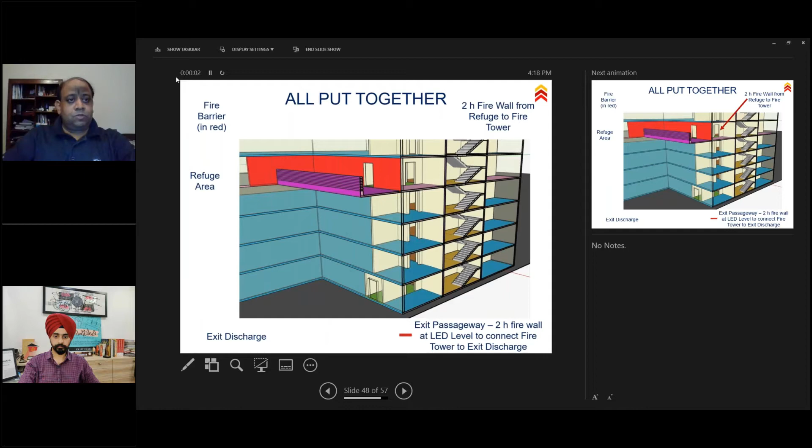Thank you. So I think the topic which we have chosen is to talk about the aspects of the relationship with respect to the fire tower. Now on fire tower, give me a moment, please. Okay, on the fire tower, I think there have been a lot of deliberations ever since it got introduced in the National Building Code 2016 version, which got released on the 15th of March 2017. A lot of deliberation has happened with colleagues, friends, and architects to talk about the various kinds of design requirements on a fire tower.

And I think the whole approach has been to bring excellence with respect to life safety. A fire tower is completely looking at the aspects of life safety, and that's where a very focused understanding is required, in the interest of the occupants who are there in the building. So it integrates a lot of architectural planning and electromechanical planning, and that's the whole approach of having a fire tower requirement.

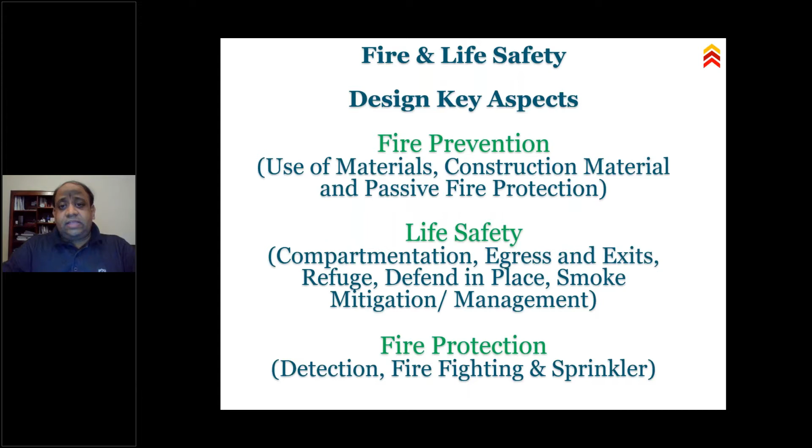And that's the whole idea, to work with my friends, colleagues, architects, engineers, to explain, to understand, and to carry the message of challenges they face in the planning and design of a fire tower. Now, this is one of my favorite slides, which takes me back to school days, listening to the story of the five blind men and the elephant. A lot of times we all work in our own silos, architects, engineers, owners, contractors, everybody looking at the same thing from their own perspective. And that's where a lot of disconnect comes, where we are not able to relate what we want to do.

And the opportunity which we take up at FSAI is to remove those doubts and understand which is the elephant in the room, what we have to deal with, and what we all are working towards: making sure of the fire safety and life safety of the people who are occupying the place. Now, if you really look at a design approach, it goes into many parts.

Smoke mitigation requirements. We hear a lot from everybody saying a lot of people die in smoke rather than in fire. That's true, but the ironic fact is that we also need to resolve the problem. Beyond just saying that a lot of people die in smoke, not in fire, what is to be done so that people do not die in smoke?

What is it that we have to do? Pressurization and ventilation are two great aspects of it. I call it smoke mitigation, because smoke mitigation comes from combinations of various requirements which we plan for. Zoning of the air conditioning system is very important.

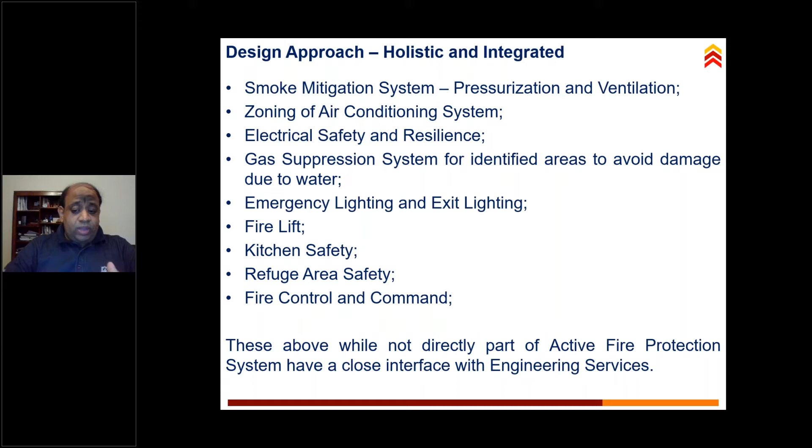But believe me, when you get stuck unfortunately in a space experiencing fire, emergency lighting guides you with lux levels, and exit lighting guides you through indicational arrows. These two are like somebody holding your hand, taking you through difficult times to what's known as an exit. Fire lift, kitchen safety, refuge area safety, fire control and command - these aren't exactly part of active fire protection systems, but they interact very closely with engineering systems. These systems cannot work in silos; they have to be aligned with the engineering systems in a very focused, articulated way.

Now, when we talk about codes and standards, a lot of people have their own interpretation requirements. They have their own policies, their own means. They would like to hear and listen to something which their eyes and ears want to listen to. But is this what the code mentions? Despite the fact that the code would like to highlight as much.

Now, I meet many friends who say, let's say a compartmentation of a space is 3,000 square meters - okay, about 750 square meters you need to do compartmentation. Fair enough. What's the size of your floor plate? My floor plate is, Sandeep, 3,500 square meters. Okay, fair enough. Do I need compartmentation? Yes, if you are over 750 square meters, you need compartmentation.

But do I need compartmentation in the sense that if my floor plate is 3,500 square meters, can I not make it 3,500? If my floor plate is 2,100, can I not do 2,100? The code has not ironically specified the size of the compartment beyond certain areas. So it doesn't mean that if you have to compartmentalize an area into two parts, it can't become an 80-20 split. It was never imagined that the code would be perceived differently, with people doing compartmentation in two different formats.

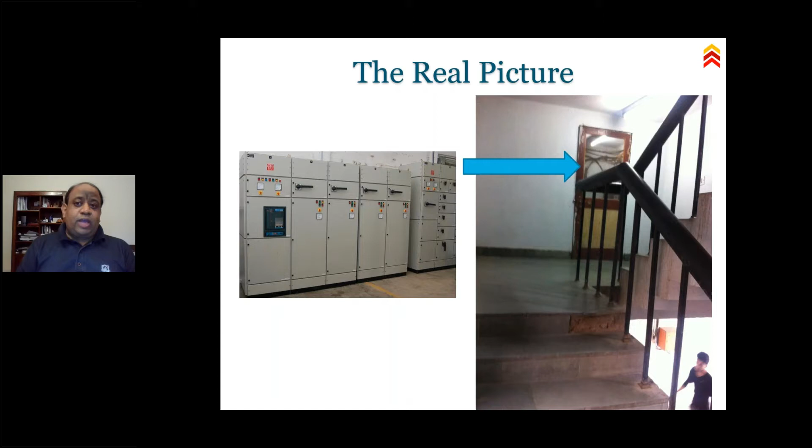So this is what I want to show you. This is from one of the malls - areas of refuge, so-called, occupied by air conditioners. This is another picture I took in Bangalore during one of the meetings. I was there, I looked out, and I saw this is where the problems are. You're looking at another picture from one of the government buildings, which you'd be surprised to see - inside the staircase there's a glass, and the electrical panels are put inside the staircase mid-landing. Now that's again a problem.

So what happened is the exhaust fan was able to suck air from the auditorium into the staircase. So rather than positively pressurizing the staircase, it was negatively pressurizing it, thereby sucking smoke from the auditorium into the staircase and throwing the smoke outside via the staircase.

Now, these are examples which are heart-wrenching to see how misunderstandings have happened and how things have proceeded further. The fear of the unknown - I've taken this from a mall in Calcutta just to show you this is a light and that's a sprinkler.

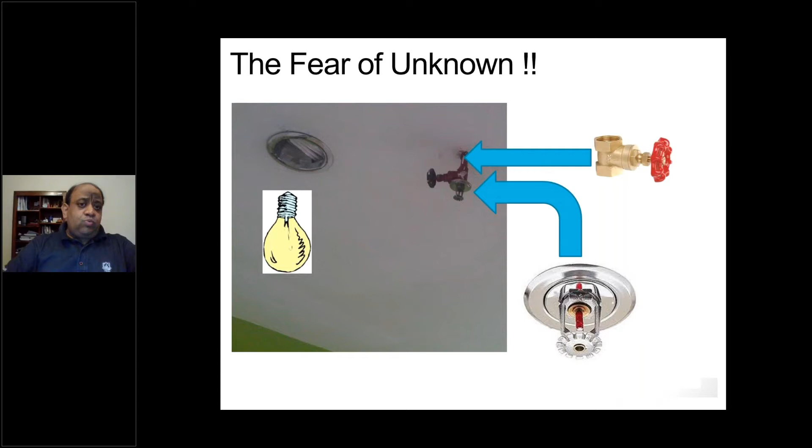Now, can you imagine these situations, with whom would you have to deal with? You're talking about codes, standards, National Building Code, NFPA, whatnot. And this is what we see, which really is so scary to see.

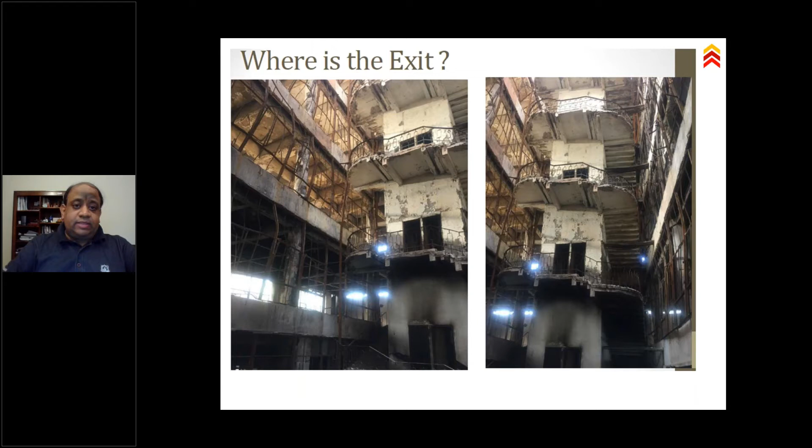Now I have another example which asks, where is the exit in this building? A lot of people would think that the staircase which is there is an exit. But ironically, in this building, there is a staircase, but there is no exit.

This is the National Museum in Delhi, which had a fire in it. Fortunately we did not lose life, but I think we lost something equally valuable, which was our assets. Once we went inside and saw the spaces, we realized how bad it could be. Fortunately, museums are not places our Indian visitors frequently go.

Unlike the Western world, they have more museums and less population - we have fewer museums and more population. So going into museums, I don't remember my friends telling me they've taken their kids to a museum. We take them to other kinds of fun parks, but we don't take the kids to the museum.

But now the element which came out of it was that typically, this is not an exit. A lot of architects would think a staircase is an exit. But typically speaking, a non-protected staircase is not an exit.

So what you see in the diagram over here - if you go around many places, you would see staircases which are open in spaces. Now, those staircases which are open in spaces are not to be considered an exit. They are pretty vulnerable. So travel distance is always counted from the end of the path to the door where you're going, because your open staircases become part of the travel distance criteria to be met. This is very important to understand - any staircase which is open is not an exit.

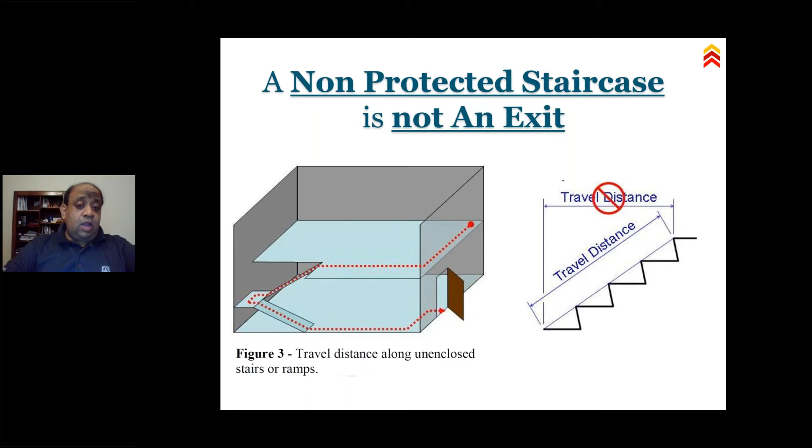And the National Building Code very clearly prescribes that an exit is only the one which is enclosed by 2-hour fire rated walls and a door which is kept always in closed position. Now, when you do that, what happens is you're able to allow the people to go down.

But when you get into the National Building Code - I'd like to highlight, since we've got a couple of young architect colleagues here - at some point, our terminology in the code was not very clear. I used to meet a lot of young friends and colleagues who used terms like fire corridor, fire path, fire route, fire exit very generically. Once you use these terms generically, you're not able to speak with the same kind of intent, expectations, and requirements. That becomes a big challenge.

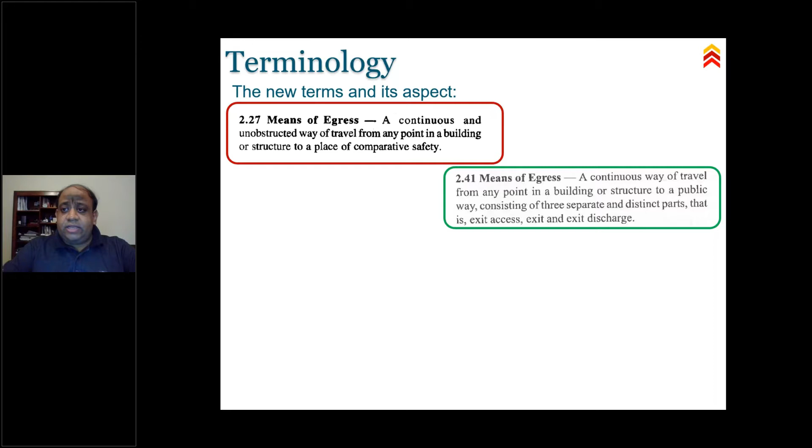So what happens is that as colleagues, we should first understand what the terminology actually means.

And exit discharge is when you come out of the exit. So what is an exit? This is an exit. An exit is always enclosed by a fire door, fire walls. Why do you need an exit which is closed? Because when there is a fire in the building, the exits help you come out through an enclosure which is 2 hours protected by walls and doors, to ensure you are not exposed to the risk of fire as you descend from the upper floors downwards.

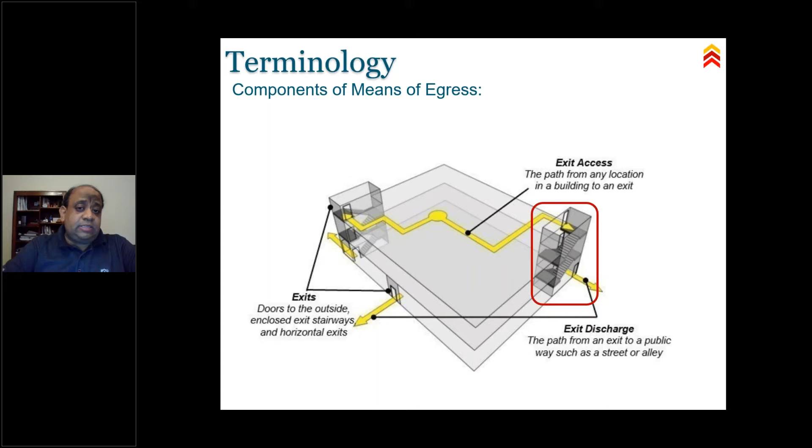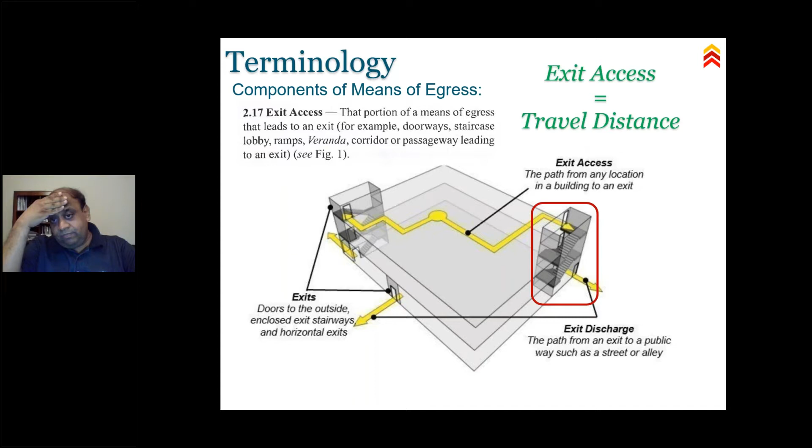Similarly, a staircase protects you from any harsh environments which might exist in the spaces from which you are exiting outside. With that aspect, the exit access is a space where you are in the environment. Exit access equals travel distance. When you read in the National Building Code, 45 meters for sprinklered buildings, that's the space where you walk to reach a staircase. And that's the travel distance.

Now, a lot of people would ask, how much time will it take to evacuate a building? I want to do a separate talk on that, and I want to tell you a very surprising fact. I'll ask you a question now. I don't have an active audience here, we have a passive audience. Unfortunately, I can't hear your replies, but hopefully in times to come, I'd like to ask my audience: how much time do you think you have to get out of the building if you are on the 25th floor of a building?

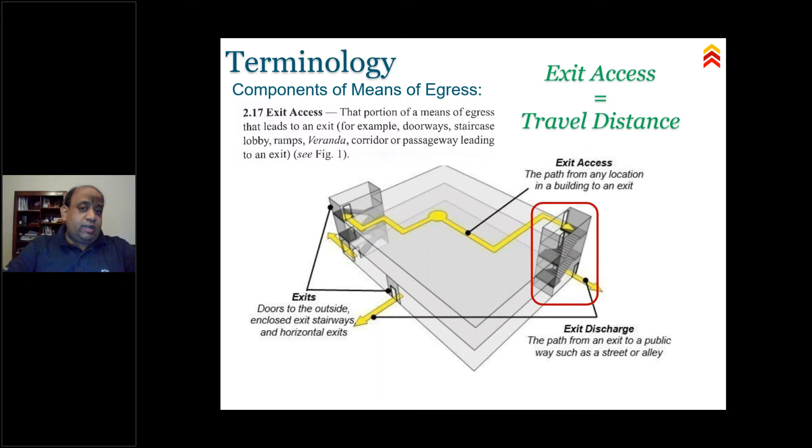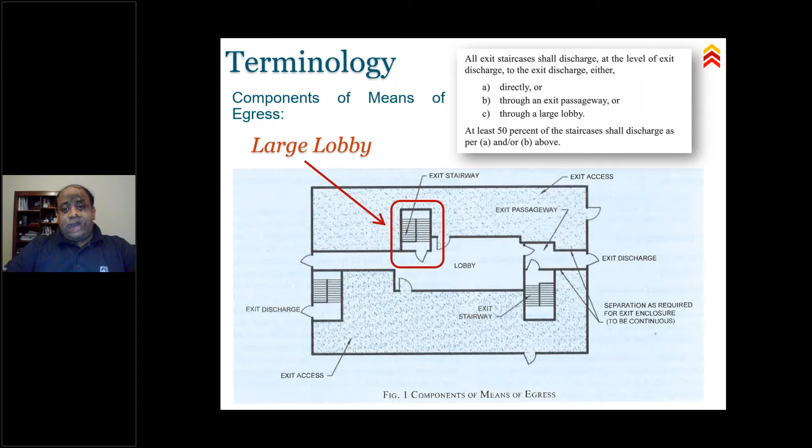The answer to that is you have got 2 hours to get out of the building. And I'll tell you how that 2 hours is arrived. Probably we'll do a separate discussion on evacuation strategies. This is basically how it goes about. Basically staircases are allowed in 2 ratios: 50% of staircases shall discharge either through direct discharge or through exit passageways, and 50% can go through large lobbies.

Now, why was this requirement introduced? If you look at the earlier National Building Code, it says out of 2 staircases, 1 staircase should go directly. The code meant to say that out of 2 staircases, 1 should go direct, meaning 50% should go direct. But when I work with my clients and some of the architects, very well-meaning people, not that they are wrong, they used to tell me, Sandeep, it's written out of 2 staircases, 1 staircase.

So you've got 15 staircases. So 1 staircase I'm taking out, and for 14 staircases, the code is not saying anything. So we realized that, while people would be well-meaning, we also have to be clear with what we want. Not that I want to challenge what people want. So if you look at the staircase on the left and the staircase on the right, if you're into those staircases, you're able to come out of the building without any challenge.

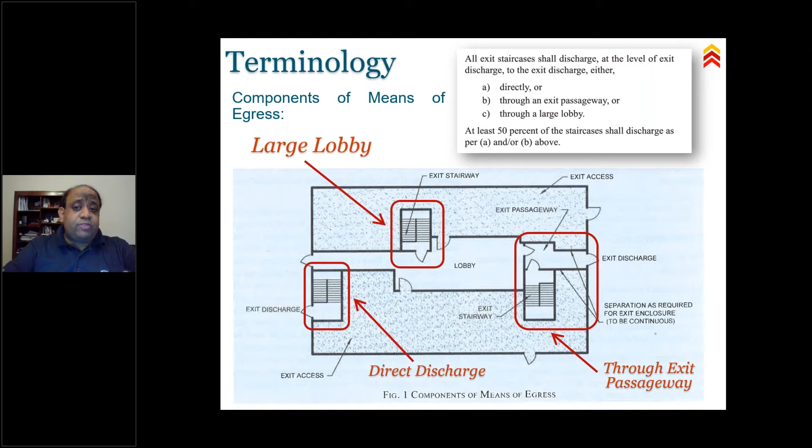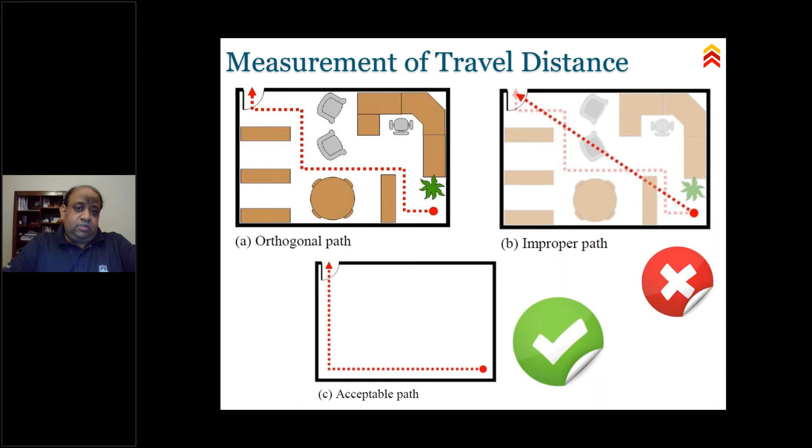The code today does not tell you how to measure. It just says do a travel distance. So if somebody is trusting you to do things rightly, it would be unfair to measure it as B. The most appropriate way is C. So if you measure your travel distances correctly, when the person is in distress, I'm telling you for sure, you will be acting like an angel to him, because you did your homework well, because you actually did the right travel distances under the category C diagram you're seeing. And that's where we can work like an angel to help the people who are going to occupy my buildings, trusting us that we have done the right work.

And a lot of times, people would even make circles. They'll draw circles, and they'll say this is what it is.

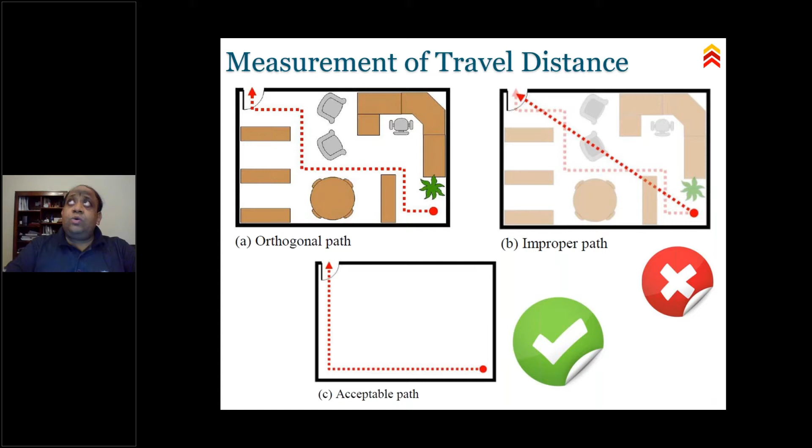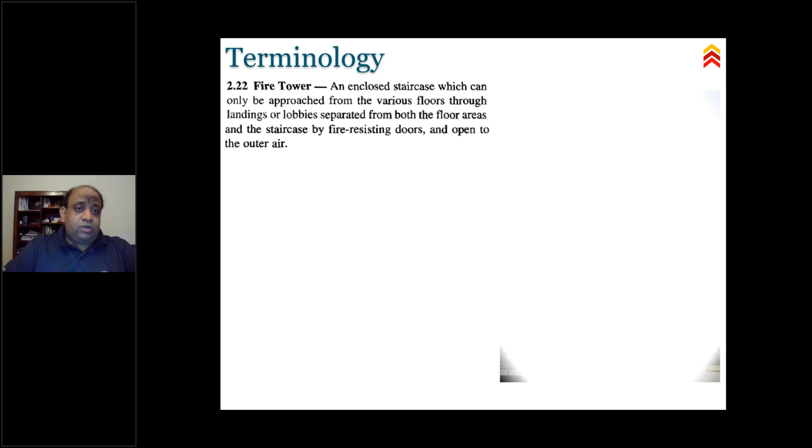So now we come to our topic of the day, fire tower. First, the whole idea was for 10 minutes, we need to understand terminology. You just can't jump into a discussion without a little background about why we are saying what. This is a fire tower definition, NBC 2005. And in fact, NBC 2005 and NBC 1997. So we had NBC 97, we had NBC 2005, and both of them had the same version of the fire tower.

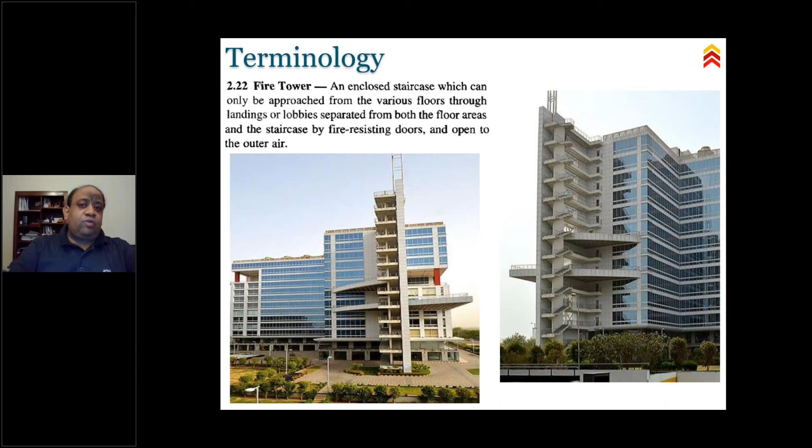If you read it: an enclosed staircase, which can only be approached from the various floors through landings or lobbies separated from both the floor. So if I try to draw a diagram of a fire tower from this terminology, probably what it comes to is the building on the right. So there is a staircase which can be approached, separated. I'm sorry. And then this is what it is. That's how a fire tower may look if you go by the definition of the code of 2005. And in one of the buildings in London, this is what a fire tower is.

This is an absolute replica of the definition of fire tower from the National Building Code. But is this the requirement? Is this what we are looking at? Is this what we are planning to provide? Is it that what we want to do in buildings which are 10, 15, 20, 30, 40, 50 stories? Is this to be replicated one on top of each other?

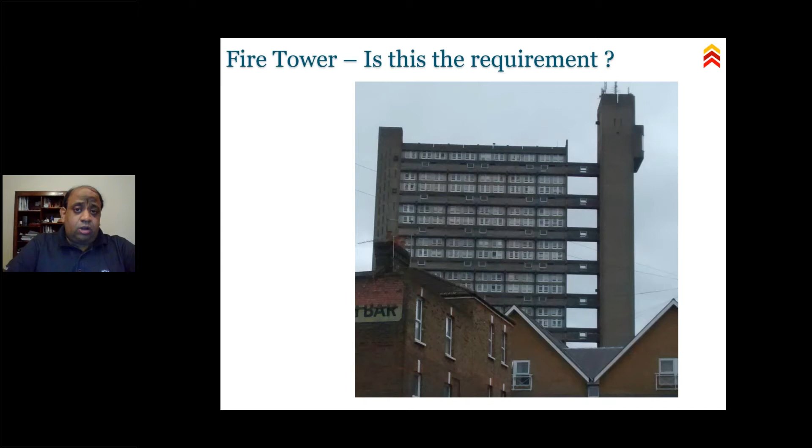No, exactly not. So you see, we came back in the National Building Code, we understood fire tower is something which already exists in something which is known as the British standards. And the British standard had a version which is known as firefighting shaft. So we landed up doing this. And I'm sure a lot of audience who are there are not seeing this diagram for the first time, but the idea was to discuss this diagram a little bit more in detail.

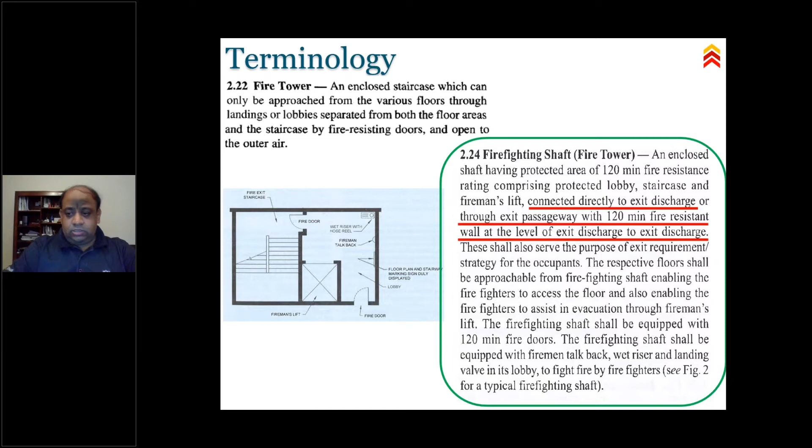NBC says that this fire tower has to get connected to your exit discharge by exit passageway. And exit passageway is nothing but a horizontal exit with the same characteristics as that of a staircase. That means nothing combustible, no obstructions, neat, clean path. And I will show you some animations with which we will get a better hang of it. Compartmentations you create, blah, blah, blah. Everybody is aware of these compartmentation requirements.

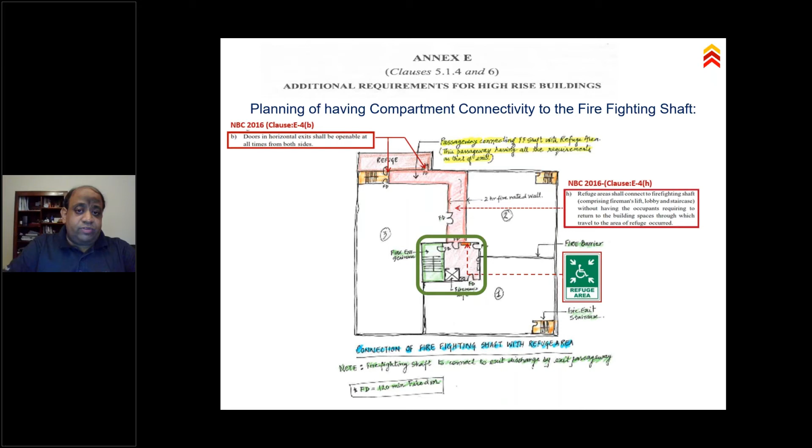So with that background, this becomes the fire tower, which basically brings all the compartments together and connects the refuge to the fire tower by a 2-hour rated firewall. Now, fire barriers are not allowed over here. You need to have a fire rated wall with a fire door. On the planning aspects, what you need in a fire tower is pressurization.

So in all these years, the design did not consider integrating the staircases and fireman lift. I go to many buildings. All of you go to many buildings. I'll come to you in a while on that. You know, these buildings have staircases sitting in the north and the elevator sitting in the south. They don't talk to each other. The whole idea was to bring them together. Now I'll tell you why this was good, but very importantly, we also create pressure differentials.

Fireman lift has to have a lobby. The code does say that if you can't do a lobby, you can provide a hoistway. That does not hold good as far as fire tower is concerned. In a fire tower, you necessarily need to have a lobby which is pressurized. I'm basically right now talking about spaces which are not naturally ventilated. I'll come to you on that.

So what you see on this slide over here is you create a pressure differential. So a pressure differential in the lobby is 25-30. In the staircase, delta P 50 makes it 80. Why have we created a pressure differential here? You see, in the old days we used to have that fort. The king is inside, it's got one battalion of an army, another battalion of an army. So you create circles, you create obstructions, you create scenarios with which if the king feels that he's exposed to risk, there is also an underground passageway.

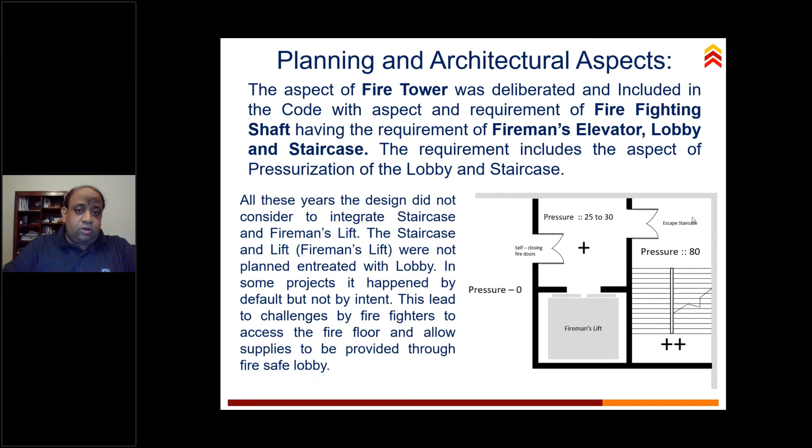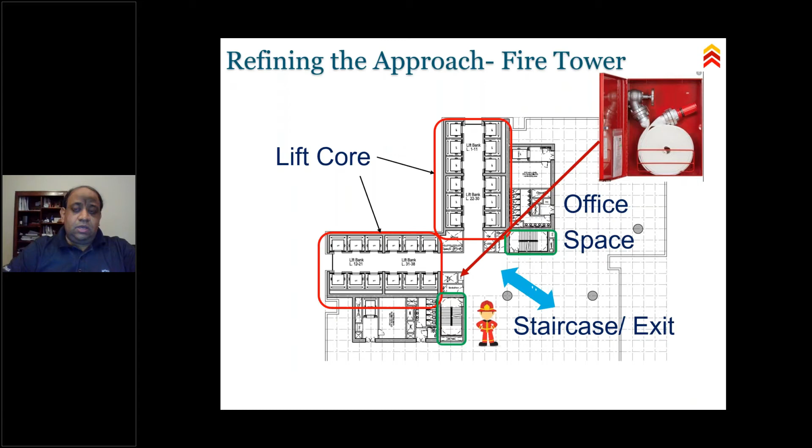He has to unroll the fire hose where the fire is already occurring. Now you come to another diagram. What we did, we created this, what is known as a fire tower. Let the lifts remain as they are. We integrated a lift with a staircase, and we introduced these areas which are known as staging areas. Staging areas which are meant for firemen to stage themselves.

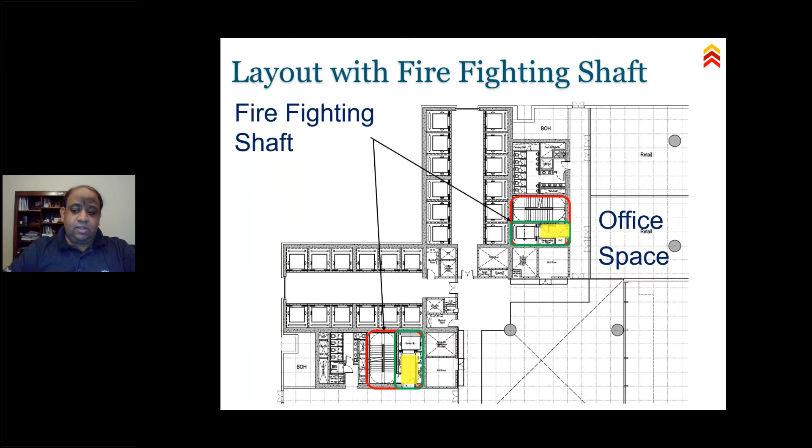I'll tell you how they will benefit. Once they stage themselves, you have got a fire hose reel in the staging area. The fireman reaches the staging area through the staircase, takes the hose and enters the space which is on fire through the lobby. Now what is left is that these staircases are normal staircases. These lifts are normal lifts. They are not fire lifts. They are not to be used by the firemen.

But what is to be used by the firemen is these ones what you see on the screen. These ones remain as they are. So what we did was we just told our developer, to be on the safe side of it, please provide me another set of 2 elevators with the staircases, and that's going to give you enough resilience in the design. And how does it help?

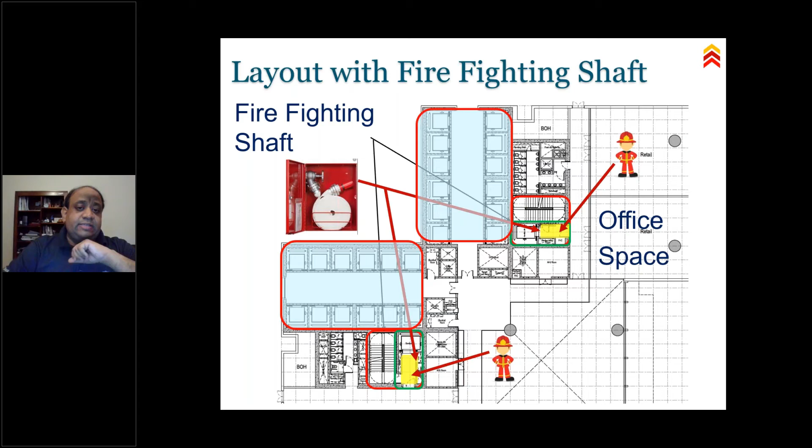Now this is a very nice picture which actually you can understand better. How does the fire tower help the firemen? This is the staging area. So you get yourself staged. Once you are staging yourself, you are able to take the hose connection, and then you are able to enter from that staging area into the space which is on fire.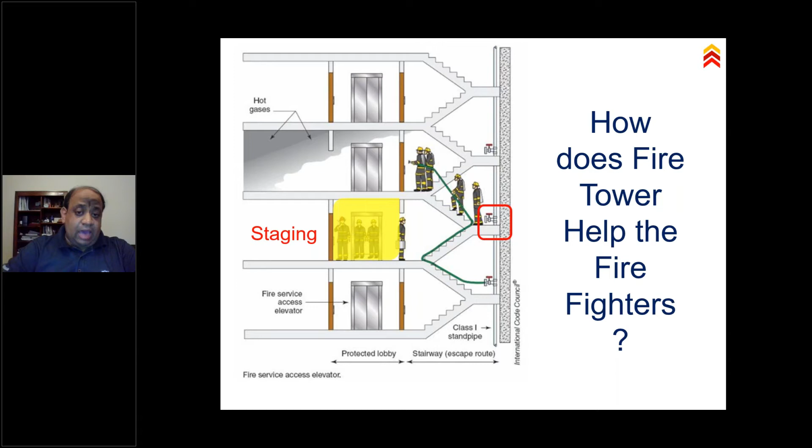Class 3 is the first aid hose reel with a hydrant valve. Class 1 is only hydrant valve. Class 2 is hose reel. Class 3 is 1 plus 2 is equals to 3. So in India, we use something which is class 3. So we have actually shifted the fire hose reels into the staging areas, which is in the lobby.

Now, very surprisingly, I would like to tell you, when I started working on international projects, I said, why are they not providing first aid hose reels? The international code would say the occupants are expected to leave the building. It's only the fireman who has to use the hydrants. We have been using first aid hose reels in our country for very long, and it has been part and parcel. So there is a lot of thought process which goes into providing a first aid hose reel.

In US or in Europe, the first aid hose reels are not provided. Class 1 hydrants are provided, and very surprisingly, the fireman has to carry their own hose. If you see John Travolta, Ladder 49, one of the famous movies of the firefighter's life, the firemen will always carry the hose on their back. They will never rely upon your and my hose, which we give them. Because for them, it's a matter of life and death when they are entering into the building.

So all they need is a piped connection. They open the valve, they put on their hose, and they go into the scene of fire to fight the fire. They do not rely upon the builder provided hose. They polish their hose, they maintain their hose, they carry it on their back, and they put it on the landing valve as they enter into the spaces.

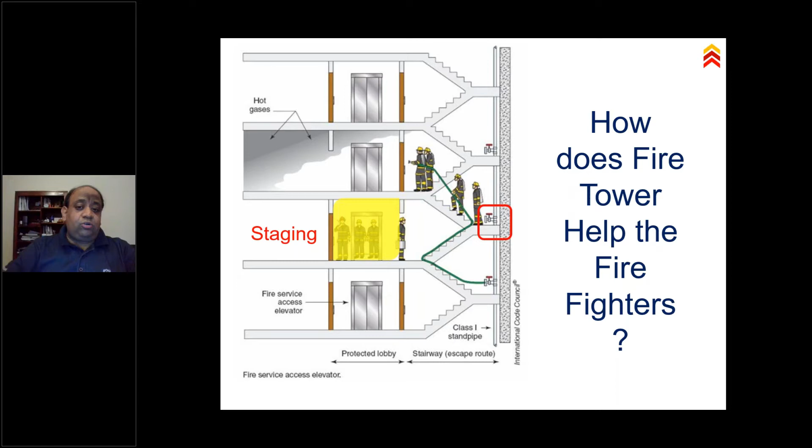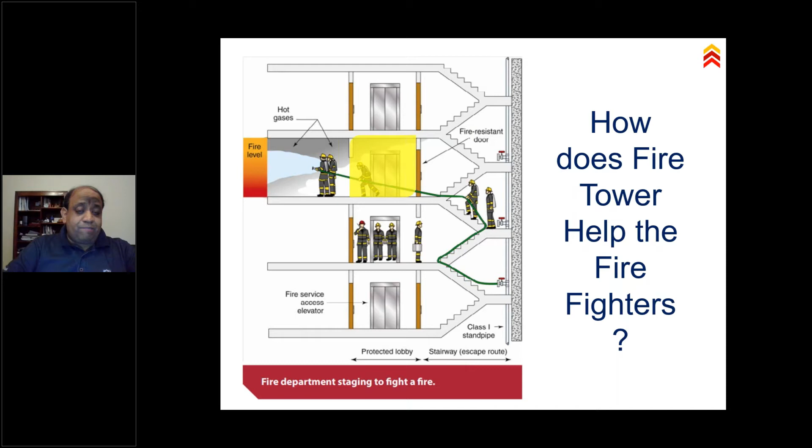So coming back to this point, this fire tower basically is an amazing design to allow the firefighters to enter into the areas over there. Now, this is where the staging area was there, and that's what we have planned as far as fire tower is concerned. Now, I'll show you a picture of a fire tower in Singapore. I was there last year in October. I went around, there was some free time.

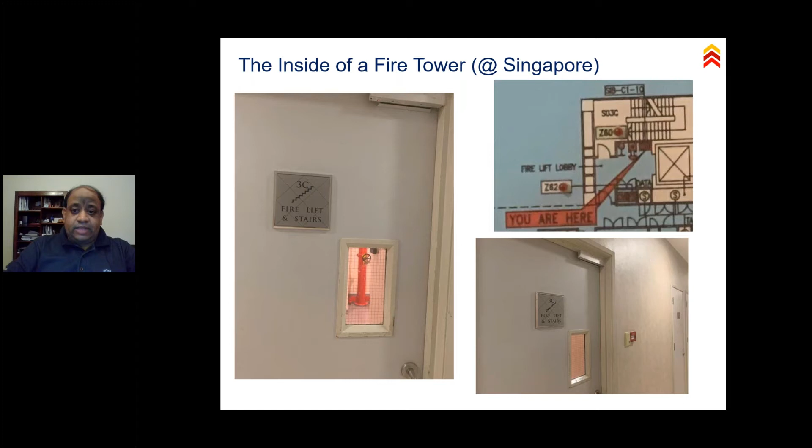That's the picture. You can see from here, you have got a hose reel inside, and that's what a fire tower looks like in a building which is in Singapore. They have provided a hose reel, they've got a talkback, they have got an emergency telephone, and what they have made over here is known as a fireman's lift.

So this is a picture of a fire tower which I took in Singapore, which basically is the same fire tower which we have also adopted in our designs, which has got an emergency talkback, MCP, gong, landing valve, a pressurized lobby, also a fire lift, and what you see on the picture here is a direct exit to the staircase, which brings you out of the building.

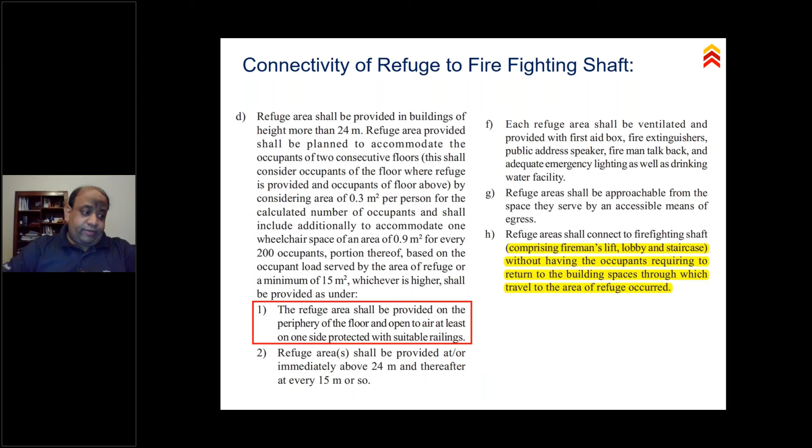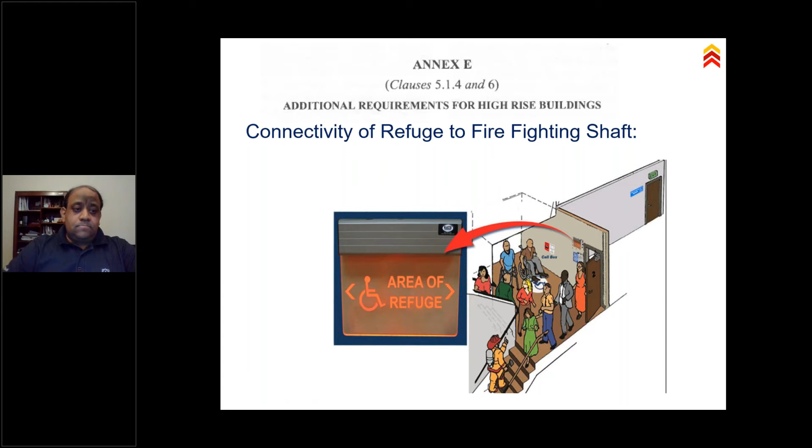Now, having said that, very importantly, I want to talk to you about something which probably might come up in times to come: refuge area. We have already done fire tower, and a lot of us understand fire tower fundamentals. But let's understand, this is the change which we expect to bring, area of refuge. Okay, that's a building which you would imagine we would have in India, correct? A tall building.

The first refuge comes at 24-meter height. The next refuge comes at 39-meter height. The next refuge comes at 39 plus 15, another 15, and so forth. So you keep creating refuges in the building as the building progresses in height. Now, this is where our present design comes to.

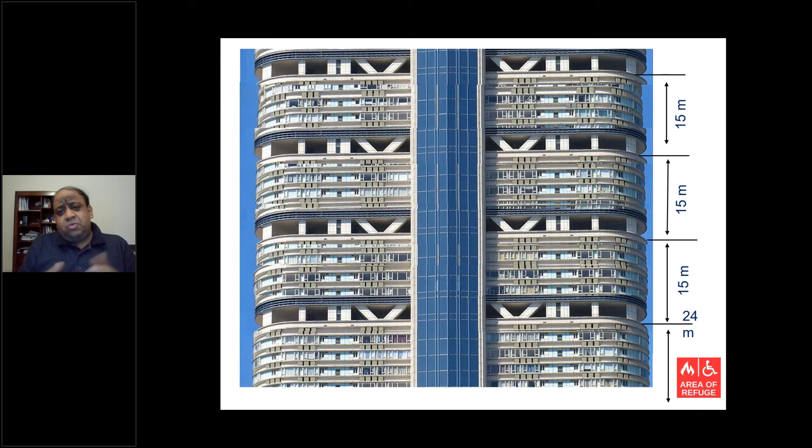And well, we can debate about 24 meters. If I have a floor which is not at 24, it is at 26, then is it right? A lot of discussions do happen on that, but fundamentally 24, 15, 15, 15, 15 is what the code is about. So let's say we have a building which is 300 meters tall. This computer screen will become smaller. I have to zoom out to show you a 300-meter tall building which has got refuges at every 15 meters. It will be a building to be seen.

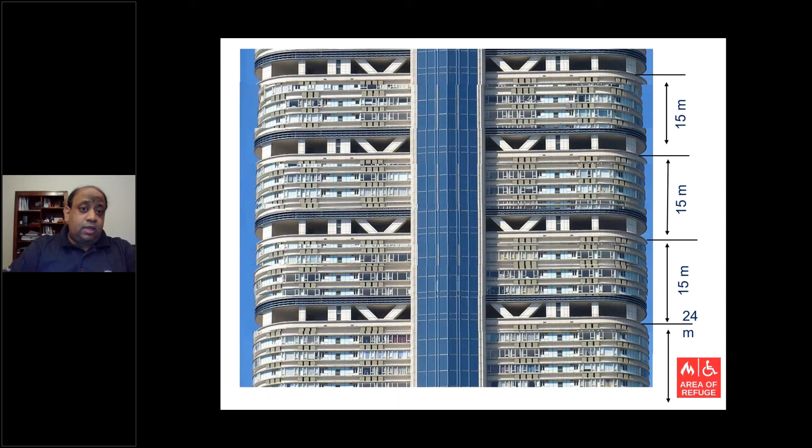But now, one important thing I'd like to show you before we get into refuge areas, something which I learned. What is the density of a refuge? Architects, you call them up. No problem. Do a total of floor A plus floor B. A plus B equals, let's say, C. C multiplied by 0.3 is the area you have to put to refuge. Provide one wheelchair and stretcher and done. The calculation of a refuge can be done on your airline boarding card in half a minute if you know the occupancy of the floor, period.

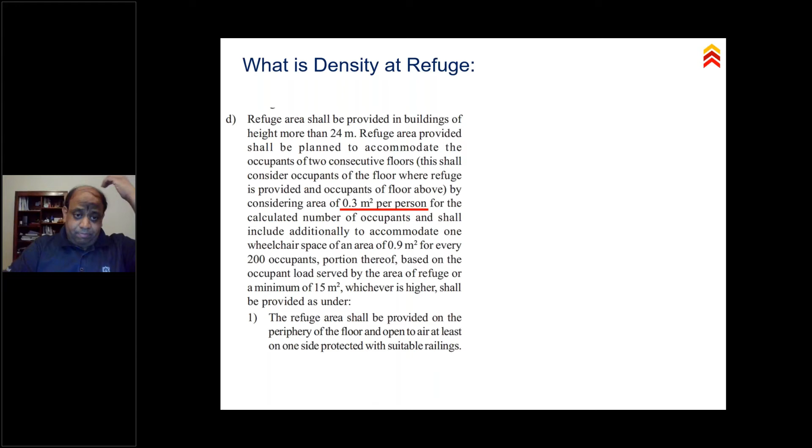But tell me, how many of us would imagine what is 0.3 square meter per person? Have you seen a picture of 0.3 square meter per person? This is a very nice picture I want to show you. This is 0.28 square meter per person. Can you imagine? 0.28 square meter per person is the picture what you see on the right.

And the NFPA says when people are crowded so that each person occupies less than 0.65, and I'm reading it because it's very interesting to read, movement approaches a shuffle. When a person occupies less than 0.28, jam point is approached, and all movements by the occupants come to a virtual stop. I would imagine we should create some experiment back in India to show what 0.3 occupancy would mean in a refuge. When you start packing up people at a density of 0.3, the NFPA says it comes to a jam point. And when you're at 0.65, you are at a shuffle.

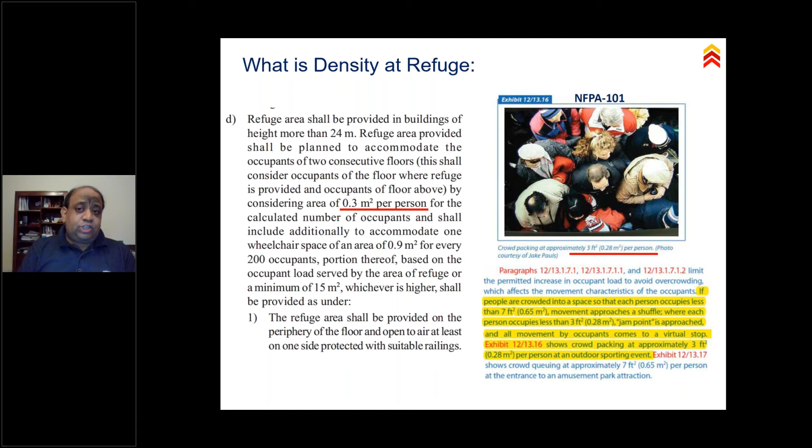We can talk about hospitals, and for hospitals, progressive horizontal evacuation design criteria are separate. But can you imagine what 0.3 would be? It would be a nightmare for you to pack up your family, your wife, your child, yourself, maybe one of your cousins who's there for your shopping, and pack up everybody at 0.28. I feel very scared. So that's what is there.

And this is back to our building where we were. These are areas of refuge in yellow lines which we have identified. Very nice. And tell me something, the refuge areas are meant for who? Is it meant for people like you and me to go to refuge areas?

Well, no. If you see the sign of a refuge internationally, you see a wheelchair over there. Go and Google the symbol of a refuge area. It's never shown a happy man standing on a refuge. It's always people who need assistance who have to be on refuge. There could be an old man, a man in a wheelchair, a pregnant lady, an old lady, there could be many people who need assistance.

And those people can be in buildings. You've got these area of refuges shown in the yellow lines on the screen. But are these people going to be only on those yellow lines?

If your wife works in an office and she's on a family way, working on the 14th floor which isn't a refuge area, would you ask her boss to shift her to a department that has a refuge? Since she's working on a floor other than the refuge areas, would she request her boss, 'Sir, I can't work on the 14th floor, there's no refuge floor there, I want to go down'?

Your father is working in an office, he's a little old. Do you think you'll break your foot? Come on, you can also break your foot. You'll be on a wheelchair for the next two months, but you still want to go to your office.

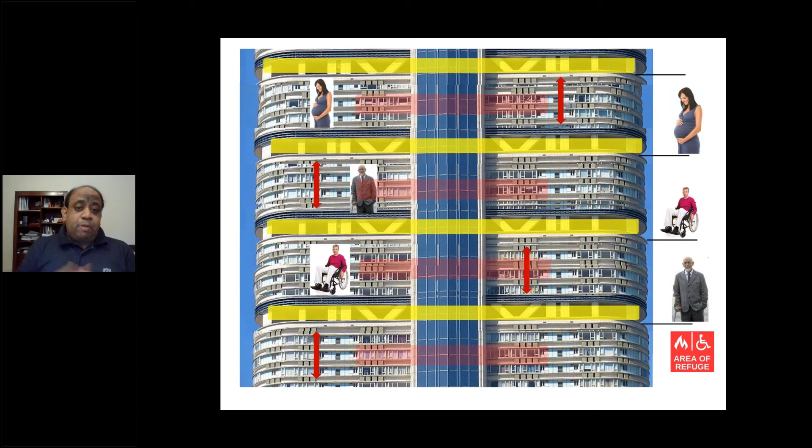Well, any of these people can be anywhere. They can be in these red zones, zones which are not meant for these people to be there. So it's very unlucky if you've broken your back or your foot and you're on one of the floors where you have an issue that you don't have a refuge.

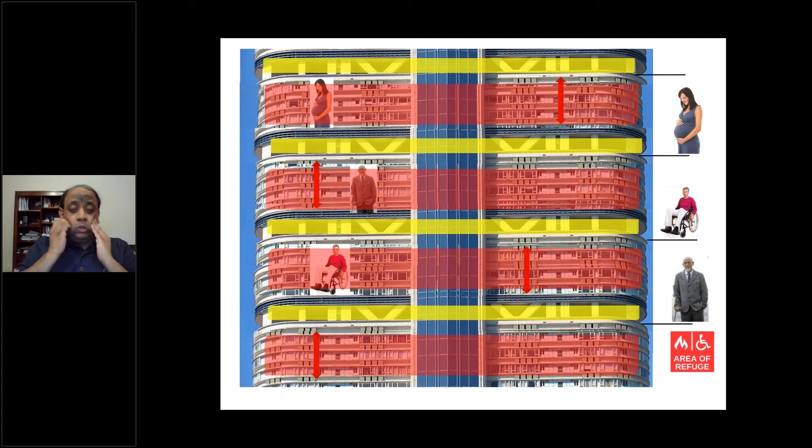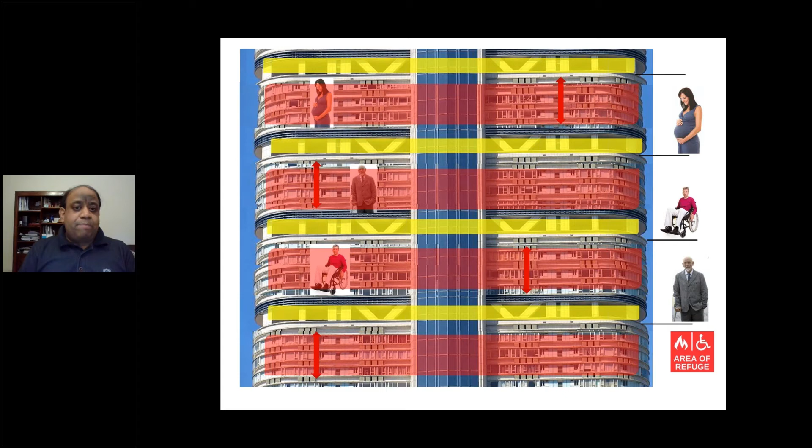So what do you do in that case? If you're on the 14th floor, you don't have a refuge, you need assistance, you're on a wheelchair, what are you going to do? Is your friend going to take you into the elevator? Elevators are not to be used by people themselves, it has to be assisted.

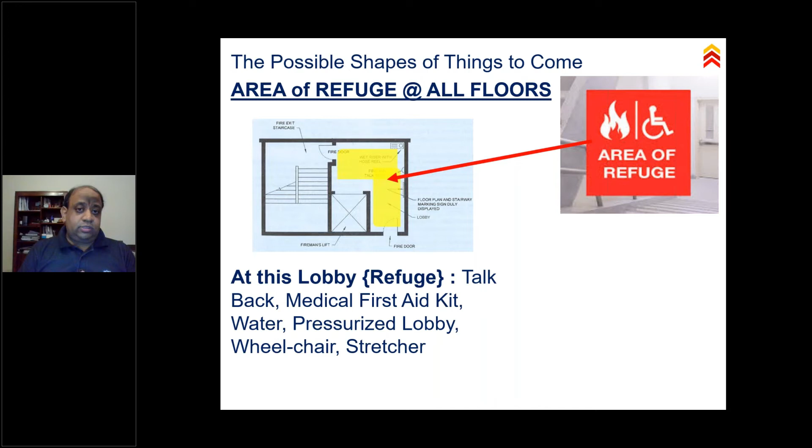So what is the possible shape of things to come? Area of refuge at all floors. So if you start identifying, in the new code, an area of refuge on all the floors, then it becomes more meaningful. What would that mean?

All these people whom we talked about are still there, but now the building doesn't look like this. In the possible way we're looking at the code getting changed, the building will look like this now. It looks very nice, neat, clean -- architects would love it. But then what do you do?

You create this, and what you've done is create a smaller area of refuge everywhere, on all the floors. So once you've done this, what happens? These people could be anywhere in the entire building, and they can enter into the area of refuges, whichever floor they are at.

You don't have to be on the refuge floor. I'll stop using the term 'refuge floor' and start using 'area of refuge' -- globally, they don't say refuge floor, they say area of refuge. So once you've created an area of refuge integrated with your fire tower, you've done well.

Now what happens? If any of these people need assistance, they'd be brought down through the fire tower onto the ground floor, with medical ambulance facilities provided to assist them. Able-bodied people -- God has been kind, I am able-bodied -- leave the building by staircases. People who need assistance, it's my and your duty to bring them into this space.

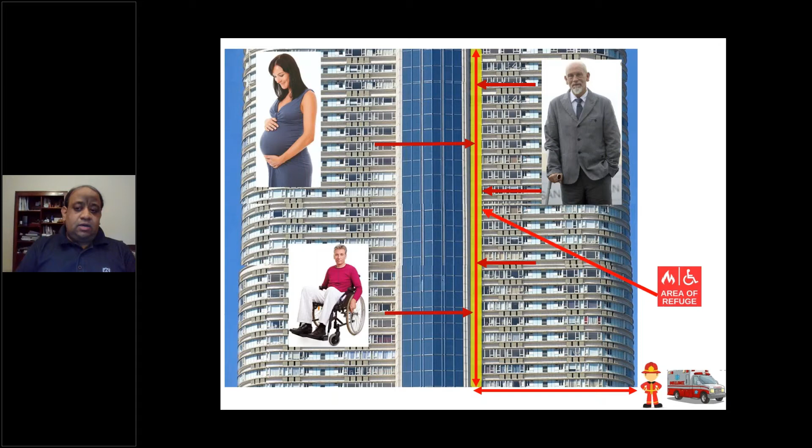We bring my friend, my colleague who's pregnant, my old colleague who isn't very healthy, into this yellow space. I say, Dinesh, Naresh, Suresh, whoever the colleague is, sit here, I'm leaving, somebody will come and help you. And I take the staircase on the left and go out of the building. I'm happy I got my friend into that space before I vacated, because that friend will now be brought down by the elevator and assisted out.

So that's it -- a fire tower and the refuge. You start creating lobbies of sizes good for handling a certain percentage of people on a given floor. Having said that, a more detailed study would be required to see on a typical floor how many people would need assisted evacuation.

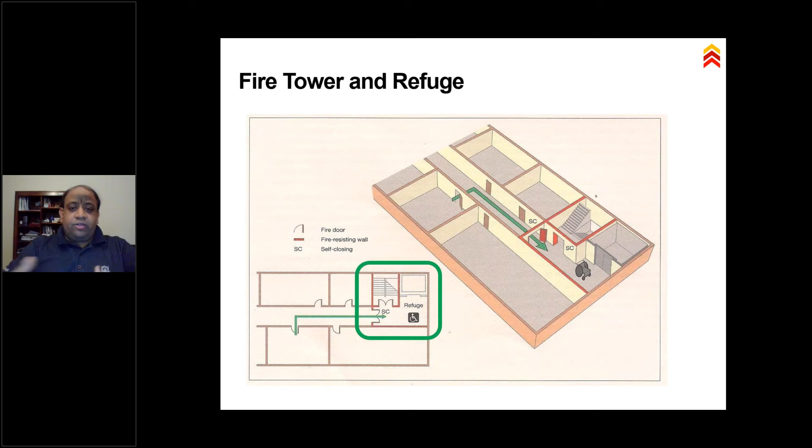That is a survey, we can do that. Let me say to you, 5% of people out of 100 would require assisted evacuation. Well, not 5 - 8, 9, 6, 4, 3, 2, some percentage we can arrive at. That number of people, we make a lobby, we stage them, we get them out of the building. So basically, this is what it is.

This is pressurization. Now the fire tower - another question, there are special notes, and I'm going to conclude this in the next 5 minutes. I'm pretty close to eating away whatever time I was given. So having said that, if you really look at the fire tower, there are special notes: the fire towers are naturally ventilated - if the lobbies and staircases are naturally ventilated, shafts may not be enclosed and fire doors may not be provided.

Now what was the reason for doing that? A lot of times we said this diagram has got a door. It's always to be understood that the diagrams are more severe, possibly having more detailed requirements than the text. You have to read the diagram and get influenced by it. But if the text is there to support or provide exemptions, the text actually supersedes the diagram. So there is a way to read a code - a way in which exemptions overrule the rule.

So if you have an exemption by notes, those exemptions take precedence over the code. That's where, if it is naturally ventilated - now what made us do this? Let's understand. Have you seen one of these WhatsApp videos which come, where you see a video with fire, with smoke coming out of the building? A naturally ventilated building is the most suited building.

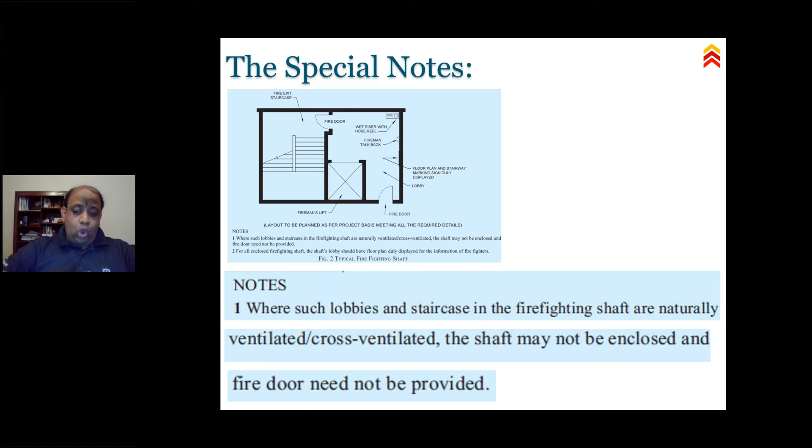Problem happens when the building is a sealed box - closed, sealed-packed, it creates smoke and you have a problem. The smoke finds the smallest of spaces to go inside and block it. That's where you need to do pressurization of these staircases when it's a closed building. But when it is naturally ventilated, no problem - you are able to take away the smoke into the natural current of the building.

Now, another thing - I have two questions here. In a typical residential building where I can provide natural ventilation, do I need an enclosed fire tower? The answer is no, you do not need it. In a project where I do not have the opportunity for natural ventilation, and I'm planning to pressurize the hoistway since I'm not able to provide a lobby - can I avoid the lobby at the fire tower and not pressurize the same? The answer is no.

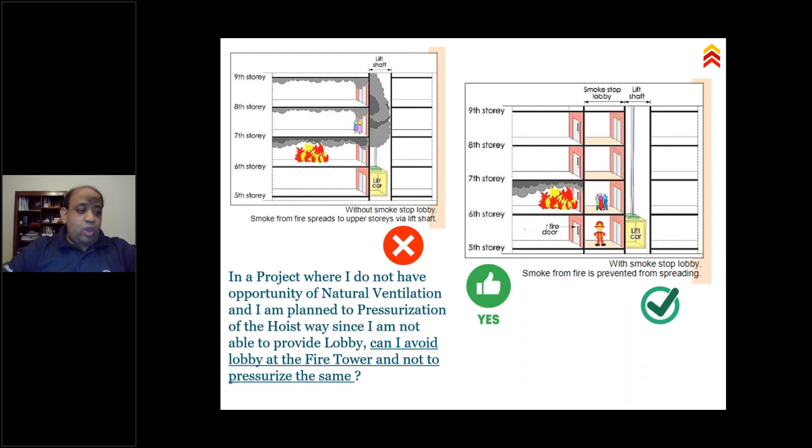Now I've explained this to you with a diagram. See this? The diagram on the left is wrong. On a fire tower scenario, if you end up pressurizing the hoistway and you don't give a lobby, where is the opportunity for staging the friend we talked about before - a pregnant lady, an old colleague, a colleague on a wheelchair - where do you stage them? So on a fire tower, you have no choice but to provide a lobby.

So this is where you create a lobby where you are able to have the firemen in the lobby, or your people who need assistance. By the time you have gone into the staircase, you leave your colleague in the lobby and you get out of the building. The fireman comes in.

One of my colleagues, Tushar, had done a presentation last time in which he animated and showed how the fireman goes into the lift car, goes up the level, takes these people out, brings them down to the ground floor and takes them out. So in a project where I can avoid lobbies, you can do that as per code. It is allowable, but in a fire tower, it is forbidden to omit the lobby. So you have to have it.

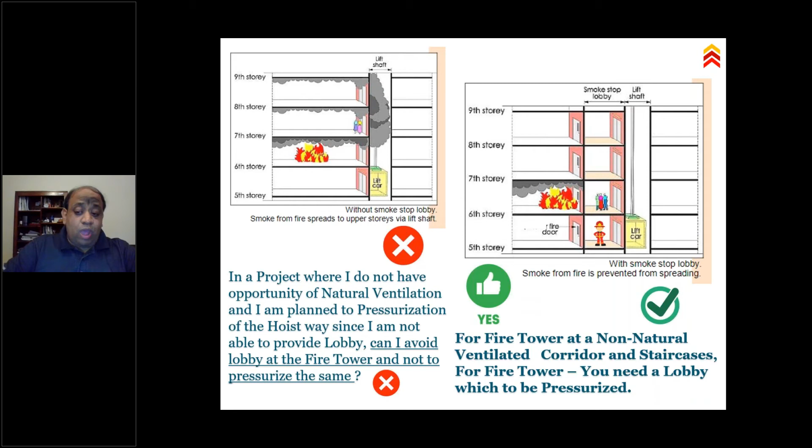As well as to evacuate the people through assisted means. So a fire tower actually does two things. It lets the fireman reach the floor of fire through a staging area from where he can guard himself and enter into the space to fight the fire. Second, it allows the people who need physical assistance to come out, be staged at the lobby, and then be brought down by the elevator.

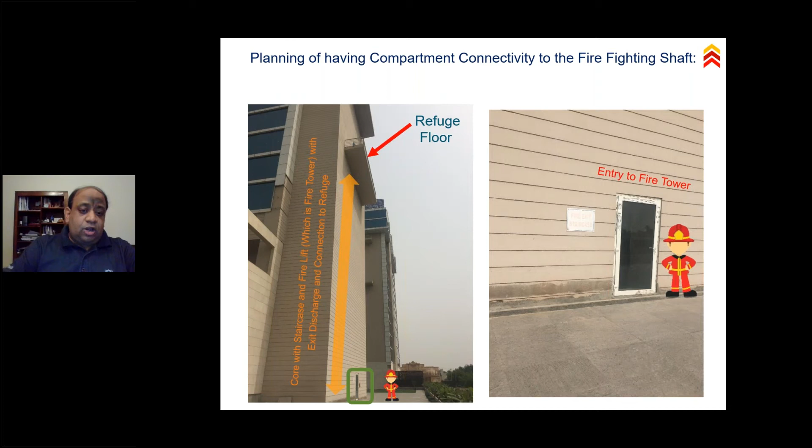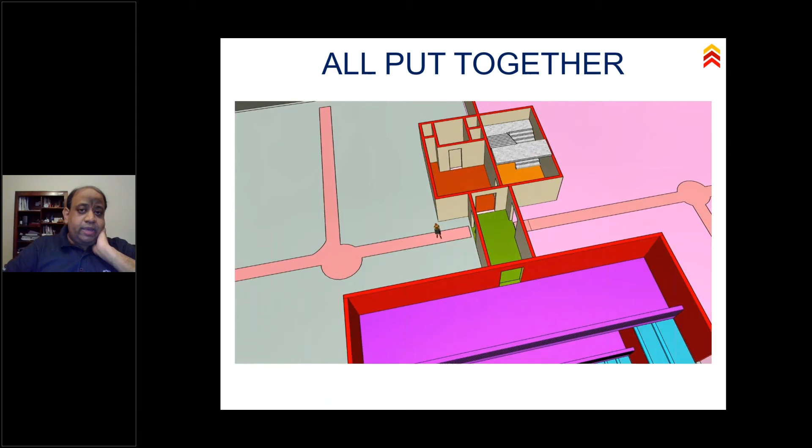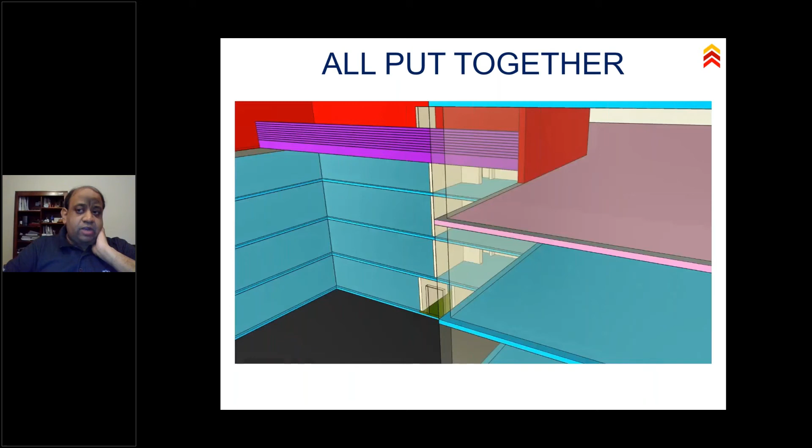Now let's see this video for a while. I'm showing you this video, which one of my colleagues has done in the office. Now what we see here is a fire tower. It has got a lobby, it has got an elevator, it has got a staircase, it has got refuge areas which we have drafted in magenta colors. And as you can see, these kinds of areas are connected through the fire tower. Once they are connected to the fire tower - this area of a lobby is connected through a corridor into this, what is known as a fire tower.

So this refuge area, which presently in the National Building Code is required at every 15 meters - in this diagram, what you see is a refuge area, then 2 floors skipped or 3 floors skipped, depending on the floor to floor height. Now, 15-meter refuge is also creating a little problem for us in IT buildings, where the floor to floor height can go up to 4.2 meters. The moment your floor to floor height goes to 4.2 meters, you have a catch-22 scenario.

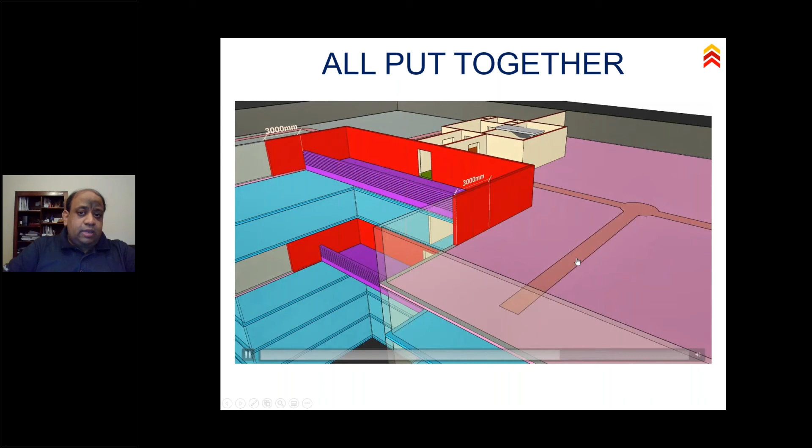So here, my refuges you can see at this location. And once you have a refuge here, they get connected into the fire tower. What you see is these two compartments are also connected to the fire tower. You can also see the refuge connected by the fire tower. And this fire tower is then going all the way to the ground. And then from the ground, you are able to go out. So now, if you really look at the next slide,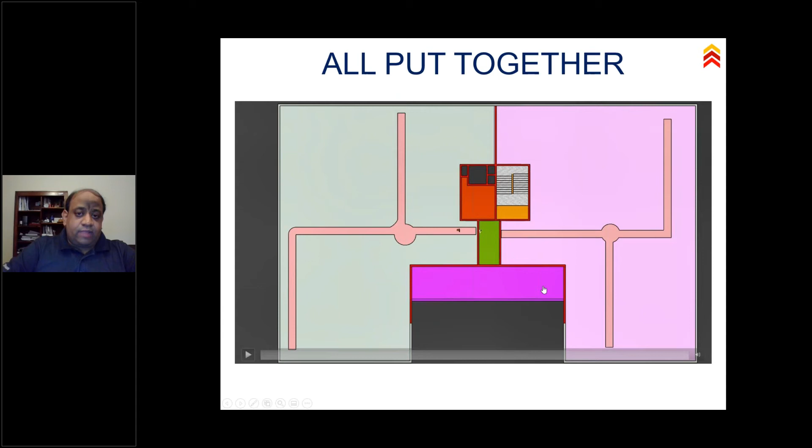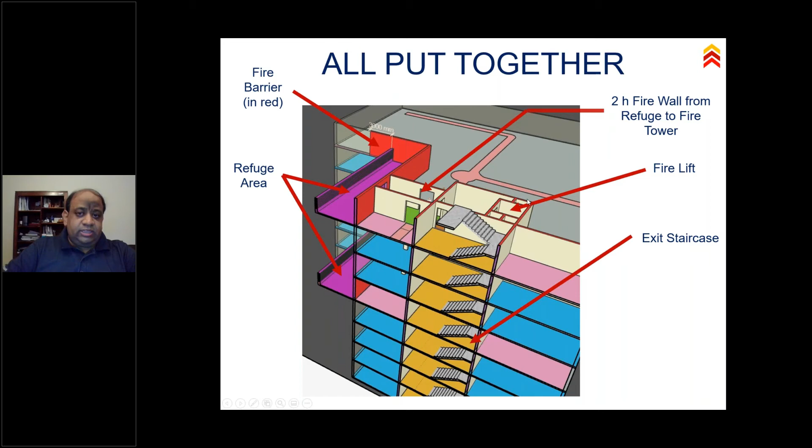This is what all put together. So what you see here is a 2-hour fire rated wall. Here you've got the staircase, which brings you down. So what you see here is meaningful. You've got a corridor which connects the refuge areas into the fire tower. You also have scenarios where the staircases go down. This is where the fire lift is. This is what you see as exit discharge. So what is happening is that the refuge area is then connected to the fire tower by an exit passageway to the outside of the building.

Very, very apt. Once this is done, do you really think we have an opportunity for the firemen to risk their lives to actually evacuate people from, let's say, 17 stories, or 27 stories, or 50 stories? That's not possible to do.

If you have a fireman lift, which needs reliable power, if you have a staircase, and if you have got a meaningful construction done, you are able to bring the people down to the ground by a modern way of using assisted evacuation by the fire tower. And hopefully if we are able to remove the refuges after every 15 meters, we create a much smaller space on every floor. That's what Burj Khalifa has.

On an 800-meter tall tower, if you start creating refuges like that, those refuges would have a lot of wind pressure. I can tell you at a height of 150 meters, even if you're creating refuges the way we are presently thinking to create, there could be a big risk to the people who are there on the building at a height of 150 meters, 180 meters. There could be a lot of wind velocity. So you need to really keep these people inside the building, not exposing them to naturally ventilated areas at the 150 meters level. So that is what it is. And I'll discuss something more about evacuation later on.

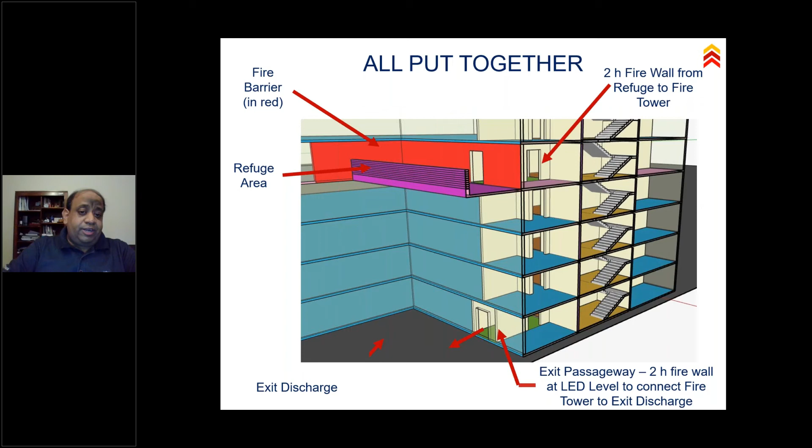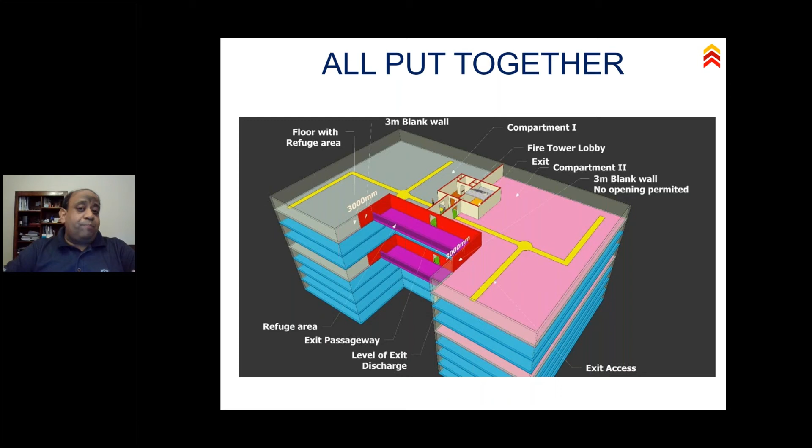This is where the whole thing turns about. So now one picture: it's got compartment 1, compartment 2, it has got a fire tower, it has got a refuge area, it's got exit passageways, it's got level of exit discharge, it's got exit access. This diagram is very, very comprehensive with respect to understanding the terminology.

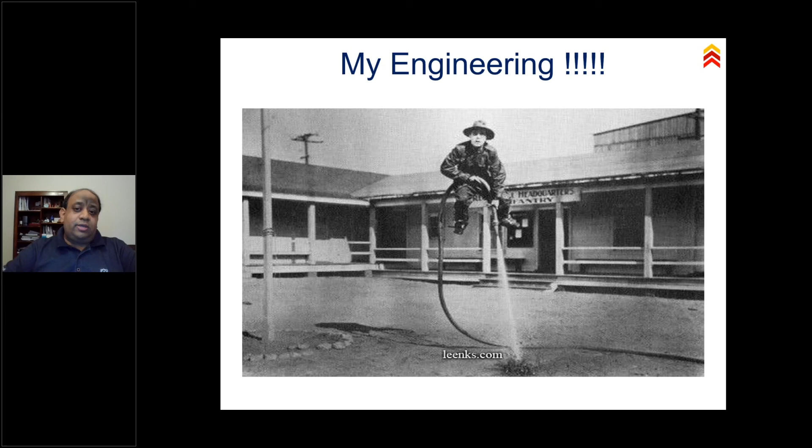I always feel, and we are coming to the end of it. I'm sorry, I think I might have exceeded a little bit, but everybody feels my engineering is the best. And I always feel, in India, a lot of my colleagues might be comfortable with Hindi, I'm not very sure. But I always see this, mujhe lagta hai scenario is something which we will really need to get out. Many people I've met, I've never seen this. Then everybody has got name dropping. I was in London, Dubai, New York.